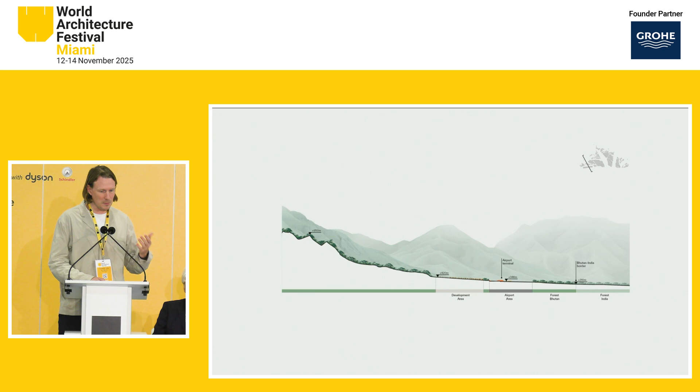So our concept for this project is to really encompass the cultural values and the natural values of the country as it is today. About 60% or more of the country is covered entirely by forest of different kinds. From the higher to the lower elevations, various different kinds of tree species.

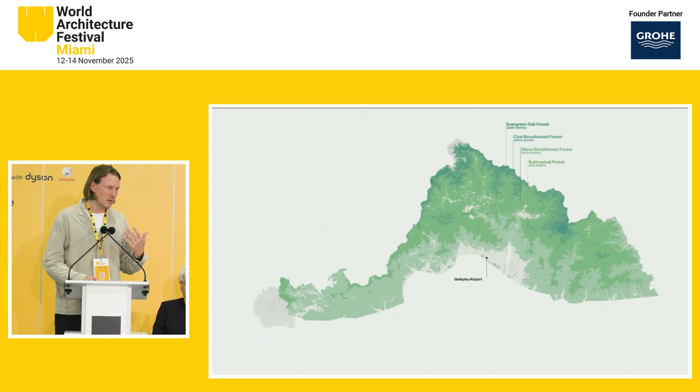And this means that Bhutan as a nation is one of the only carbon negative countries in the world, because all that forest cover actually converts so much CO2 from the air, effectively making the country CO2 negative. So this is characterizing much of the beautiful nature and geography of the country today, these different types of forest.

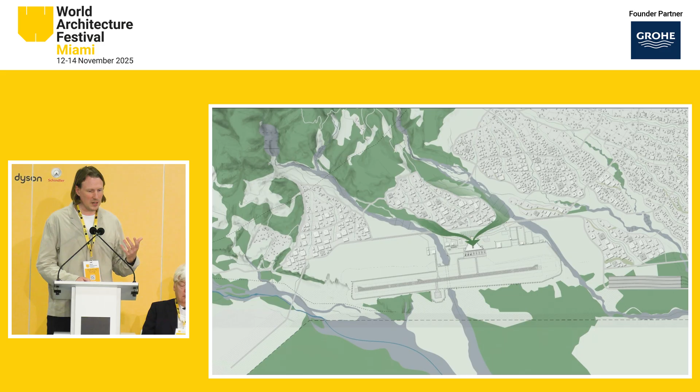So we aim here to bring that all the way up to and into the airport terminal itself, as shown in this diagram, where two of the natural corridors that frame one of the development areas of the new plan are brought right up to the arrival plaza for the new terminal and into the terminal itself.

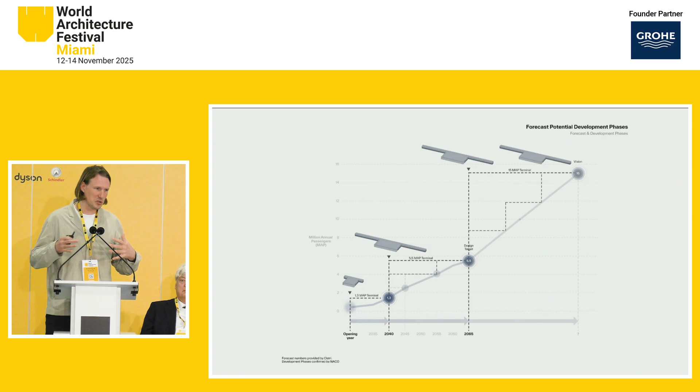The terminal is a modular design that seeks to adapt to potential future growth. It will start out with a capacity just above 1 million annual passengers, but the modular design of the terminal building lets it grow in its first size up to about 5.5 million annual passengers, and then via a potential new terminal, as we can see here, between phase 1 and 2, to up to about 15 million annual passengers eventually, if the Mindfulness City grows according to projections.

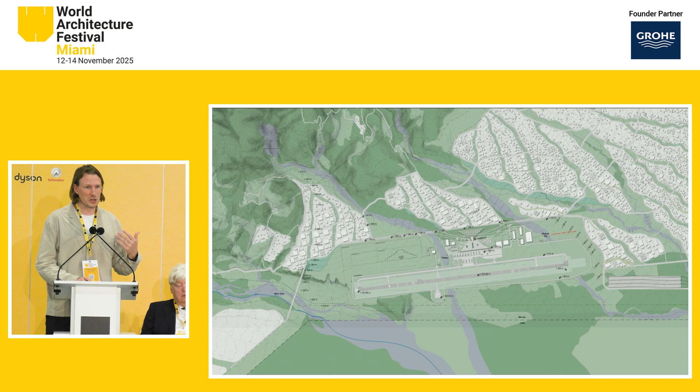So a very large focus here from our part on catering to public transport. So we placed the tram system right close to the terminal entrance, and then pushed all of the bus, taxi, and private cars off to the side.

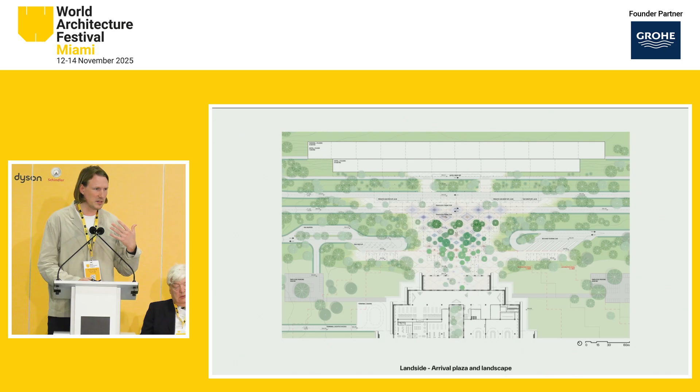So the arrival at the airport for the passengers is one that gives you a feeling of the nature of Bhutan. The arrival plaza is filled with different species of plants and trees that are allowed to be brought up all the way up against the terminal facade with some of the selections of the local species here.

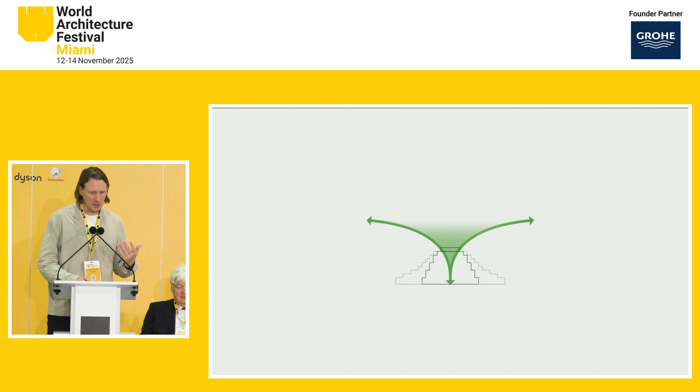So it's an entirely pedestrianized arrival experience where you see this modular profile of the airplane, the terminal roof that references both some of the traditional roof shapes found in the architecture of Bhutan today, but also the profiles of the mountains that surround the airport area. So as I mentioned, bringing the forest and the different types of forest that are seen across Bhutan into and letting that structure the departure and arrival flows of the terminal.

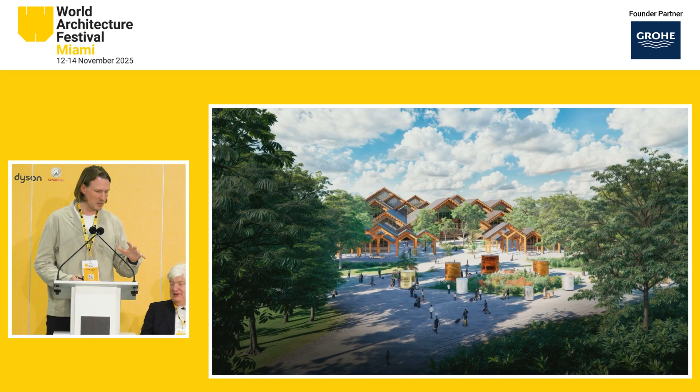So here a render of the arrival experience, where besides the natural elements that grace the arrival plaza, we have some elements of the traditional Buddhist elements, such as the prayer wheels that are typical to Bhutanese culture, so that arriving and departing passengers can have a chance to experience one of the Buddhist rituals, meditation rituals of Bhutan.

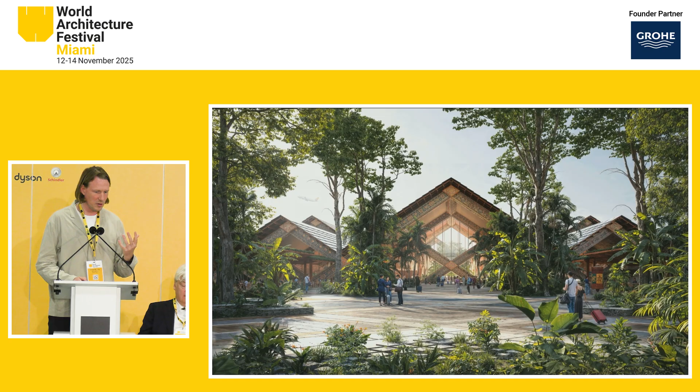So this is the main entrance view from the terminal, where you can see that the superstructure of the terminal building is carved and painted according to the traditional crafts of Bhutan.

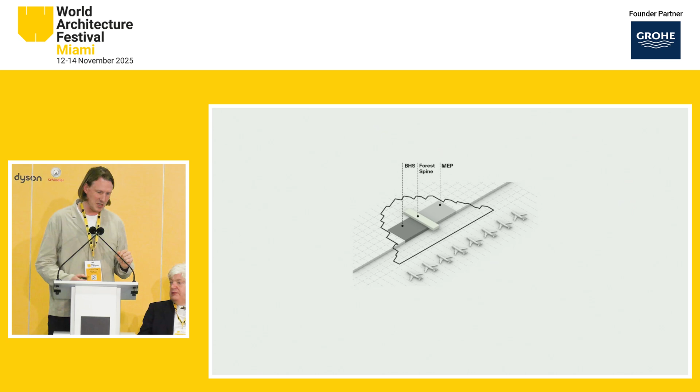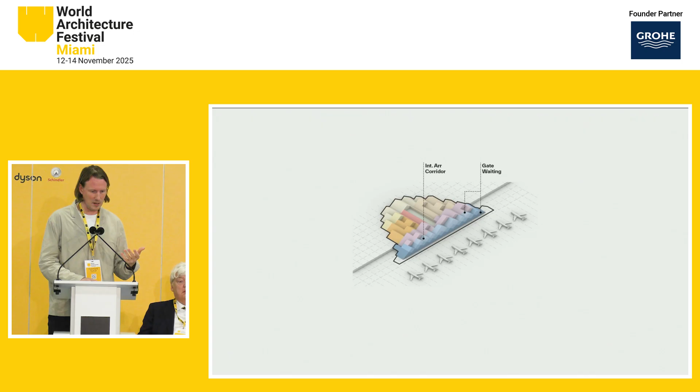So roughly, this is the organization of the airport terminal, which has this kind of wedge shape coming from the head house to the pier structure, with an exterior green courtyard at the center that then splits the arriving and departing flows, some of the security and passport check functions, commercial area, and finally the pier with all the gate waiting areas and the boarding bridges. These are the plans. I won't go into detail.

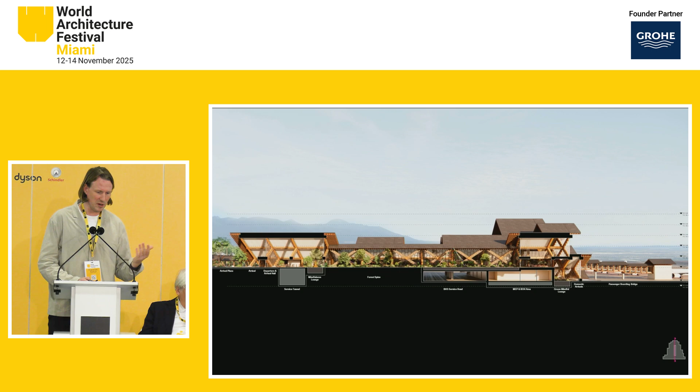You can see the cross section here, where you sort of arrive on the left side of the land side and sort of follow this exterior central green courtyard throughout your experience throughout the terminal as you go from land side to air side, where you board the plane.

We are heavily inspired by the traditional Bhutanese architecture, which is characterized by these large overhangs of the roofs and carved and painted wooden structures. So that is applied very directly to this diagrid superstructure of the airport terminal.

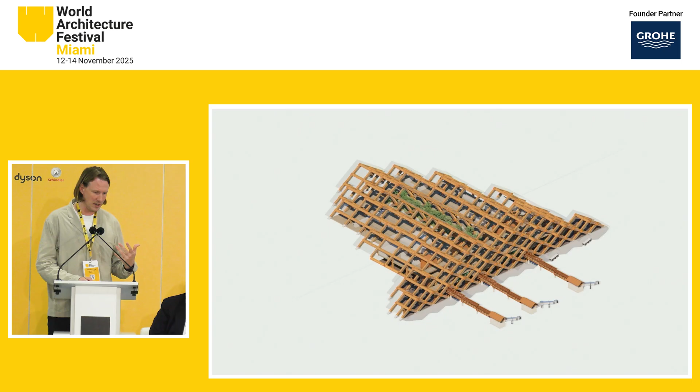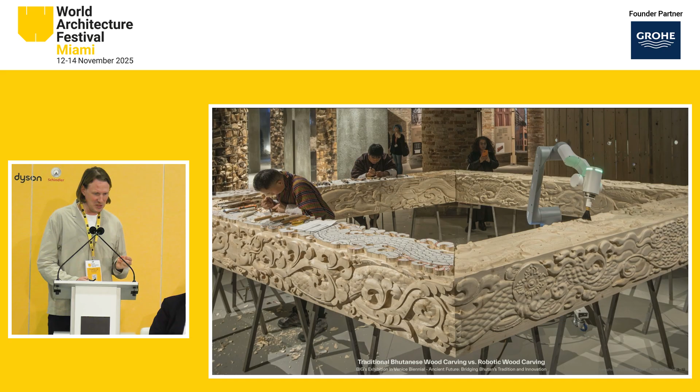We had a mock-up of this, which is still available to see in Venice this year, where half of the mock-up was carved by our two Bhutanese friends, Sangay and Yeshi, on the left side, and the other half was manufactured by an 8-axis robot.

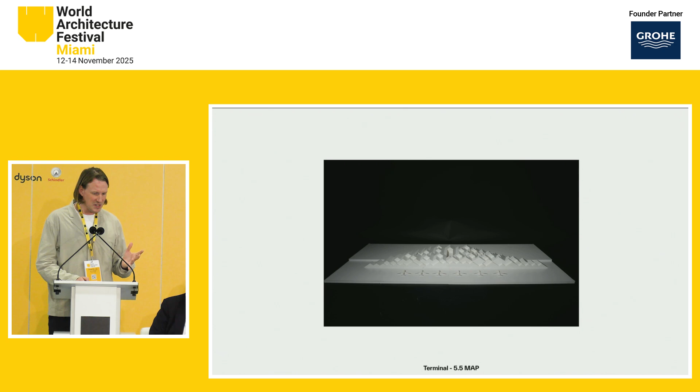So again, the modular nature of the design lets the airport grow from 1 to 5.5 million annual passengers, and the repetitive superstructure is decorated, carved, and painted by local artists.

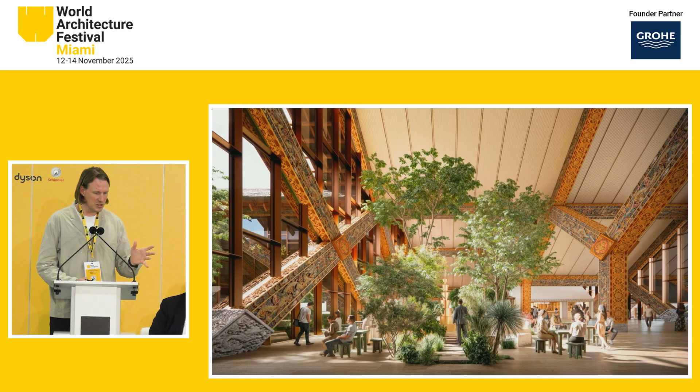A few images from inside of the terminal. This is the shared arrivals and departure hall where you have views towards the exterior central green courtyard, but also we bring elements of green inside of the building itself, so that the feeling of the Bhutanese landscape follows you through the journey through the airport.

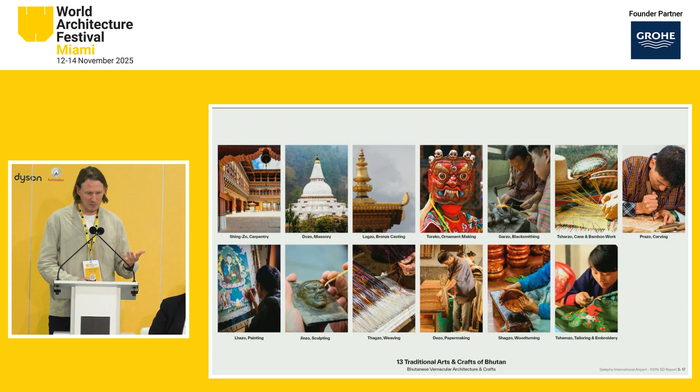We also integrate various elements from the 13 different traditional crafts of Bhutan, which are still alive and being taught in the country today. Everything from carpentry to bronze working to weaving and carving, and how these are translated to various design elements throughout the building.

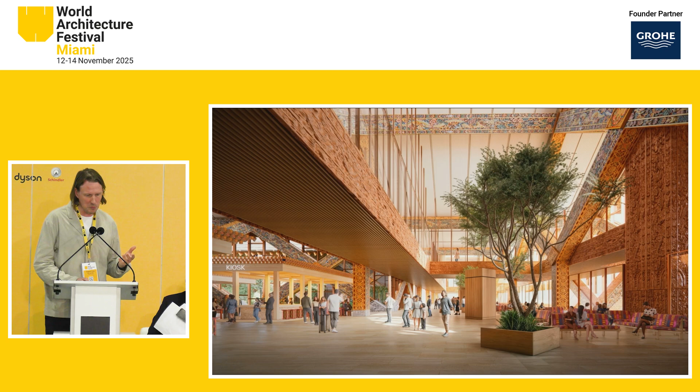Moving forward quickly throughout the rest, showing you a few images from inside of the terminal. This is the check-in area and the security area, and then this is the gate waiting area towards the air side of the terminal building, the central green courtyard, where passengers can relax during their journey after they've gone through security.

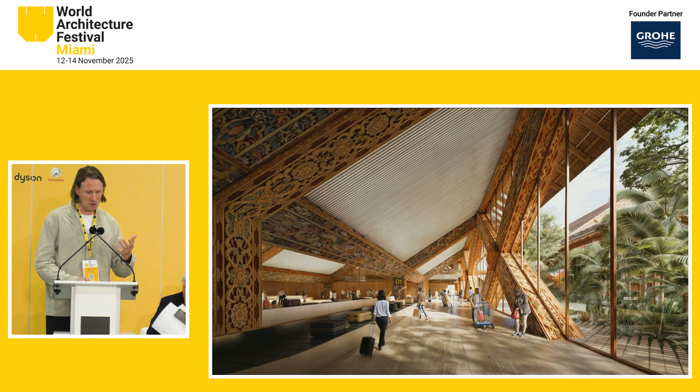And some of the different interior lounges, the baggage reclaim area, where also, instead of a typical compressed dark area, you are greeted in Bhutan while you're waiting for your luggage by this central green courtyard and these elements of the Bhutanese traditional crafts and painting.